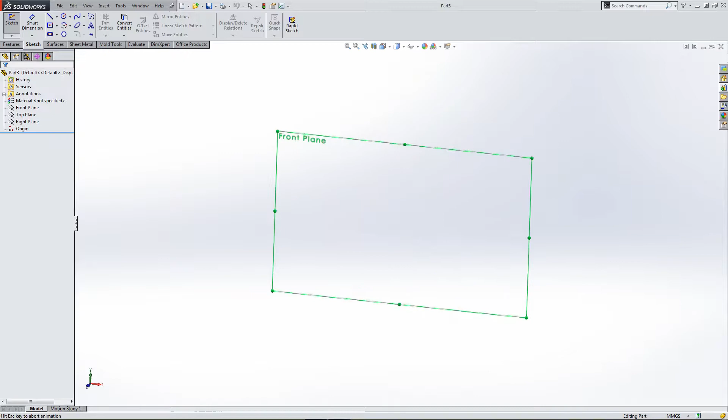Sketch a box, match up to the origin point. Then let's add some dimensions.

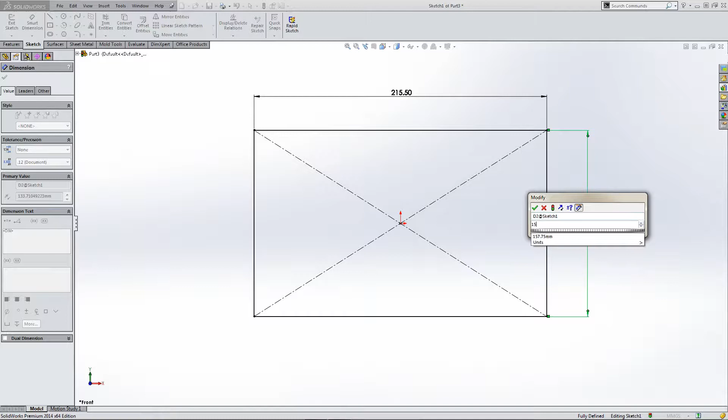215.5. Then let's add our second dimension, 157.75. Okay, so now we're ready to extrude.

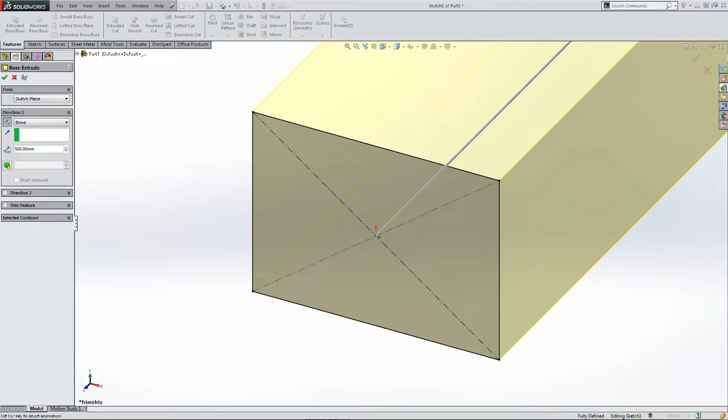Okay, so here's our extrusion option. Let's type in 500 millimeters. Let's go in the other direction. We need to see what's going on here. And extrude. Okay, so here's my box pre-made.

Now we need to add a split line, so let's draw on the top face. Let's put in a line. Okay, we're happy with that.

Okay, so now let's go to the mold tools toolbar, split line, and we've pre-selected the sketch. So now we need to select the face. There's the face.

Happy with this. It was a projection, and here's one face and our other face, both sides of the split line. Right, so now we need to go and convert to sheet metal.

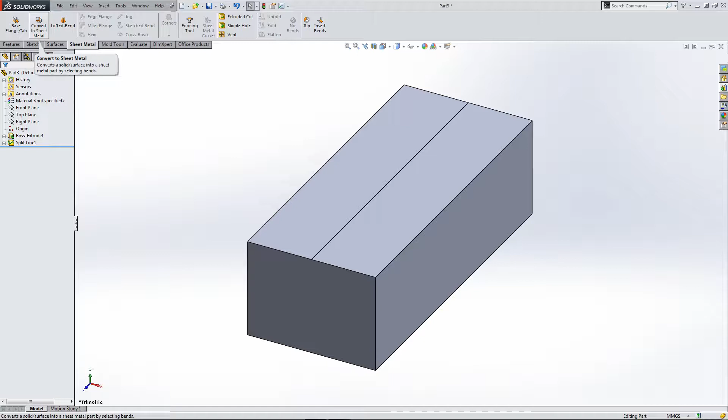So here's the icon in the sheet metal toolbar. The first thing we need to do is to select our unmoving face. And then we need to collect our bends.

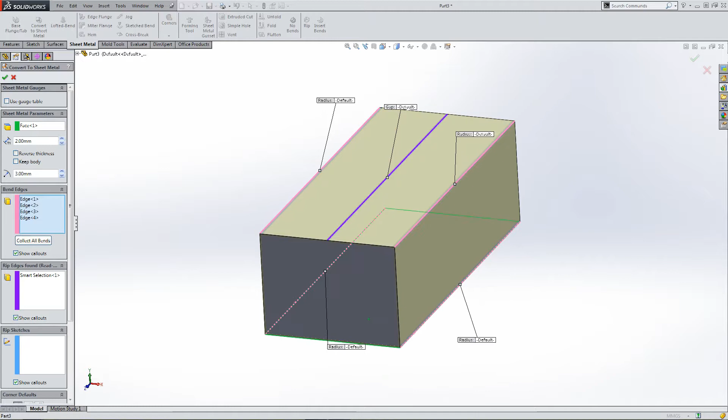So here's the first edge, here's a second edge, and then we've approached the split line, so we need to build our other side. So 1, 2 corners, and let's zoom in.

You can see the corners that we're applying by default. So we can change these, you can see in the corner, and changing to 4 mil. Let's go back to 2, and I can change the thickness. Let's go back.

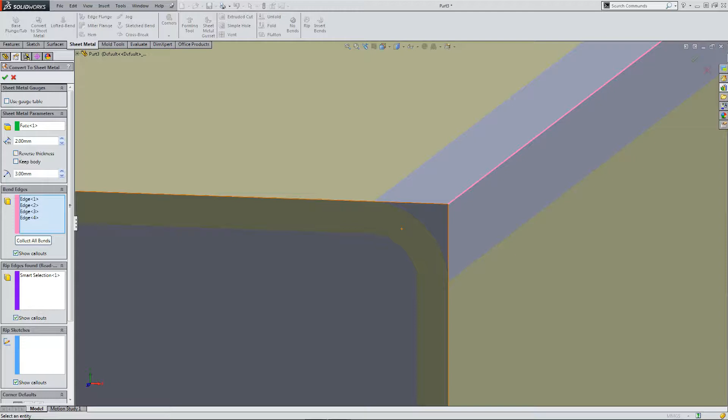We can also reverse, but we're going to build this on the inside because we've got the right dimensions.

Just in case we do want to change the width of this split, we can, if we go down to the corner defaults, you see the gap, we can modify the gap, make it a bit smaller, and we can try different types of corner fit to kind of just manipulate this gap.

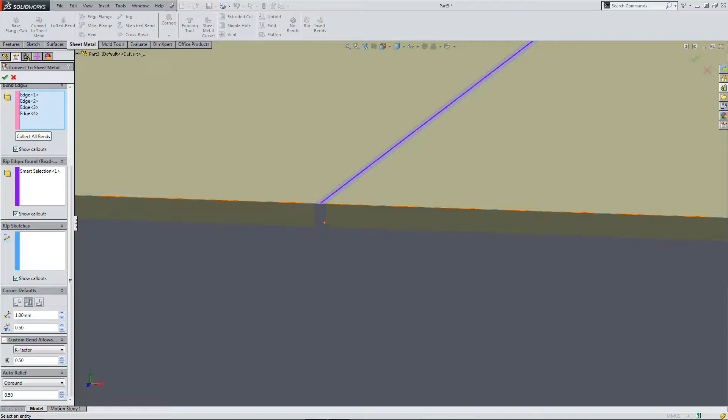Okay, so I'm happy. Let's have another look at our part before we convert to sheet metal. Okay. And that's it. That's our sheet metal part.

Okay, so here's the flat view, just to show it unraveled. So we've selected the flatten option. Now let's unflatten again. So we've got our box.

Okay, so we need some connection points for our trunking section. So right, I've just selected a simple hole. Let's map it onto this side face.

So it's going to be 6 mil in diameter. Through all, because we want a couple of holes, one on each side of this face.

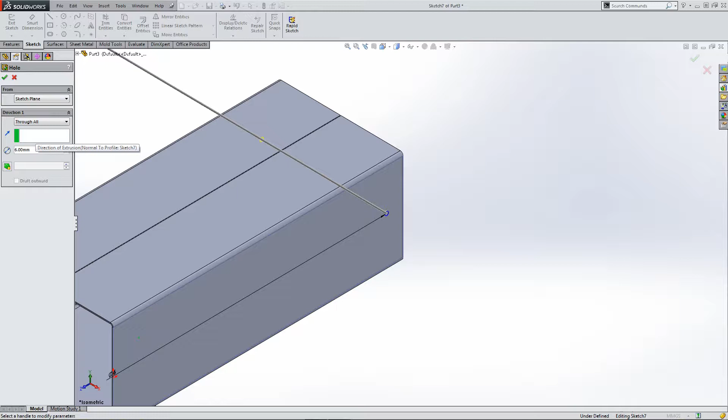Okay, so well, but we haven't positioned it so far, so we've just drawn the hole. But we can go back and we can position it.

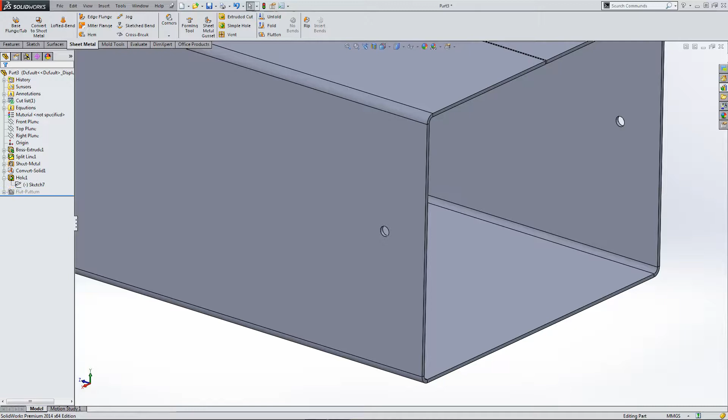So if we, let's just tidy this up. Let's go onto the side panel, select the sketch. Okay, so it's unconstrained, it's blue, so let's constrain it.

So let's put in a little mounting line, let's straighten it up, and then we need to kind of bring it a set distance away from the edge. So let's make this, let's say 10 mil.

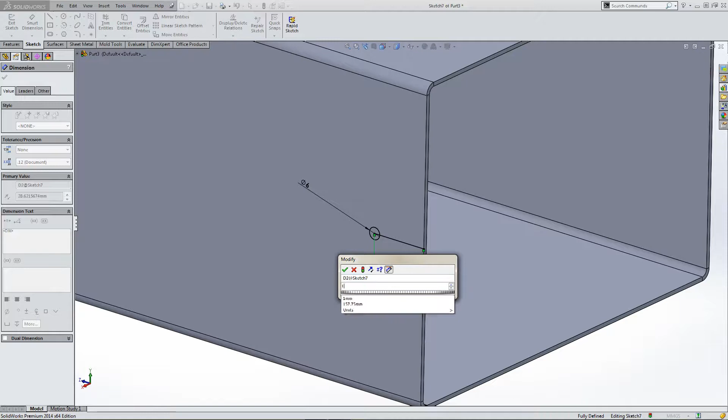Okay, and this is no good at the moment, so we need to turn it into a construction line. So I've ticked the box for construction. Okay, so now we're fully constrained, everything's black. We're happy with this.

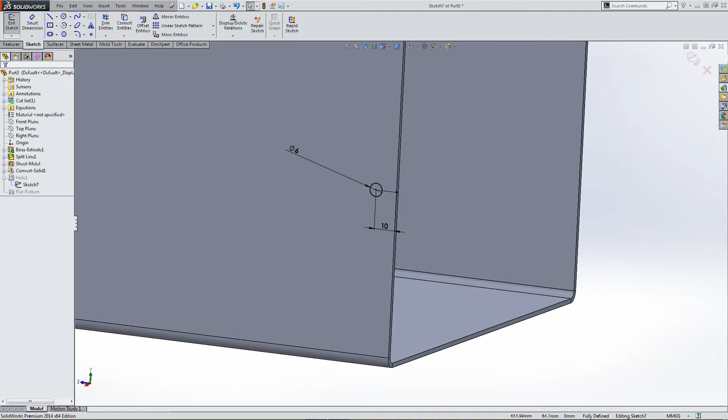Exit the sketch, and we've got 2 fully constrained holes. And that's it. That's our box section part.

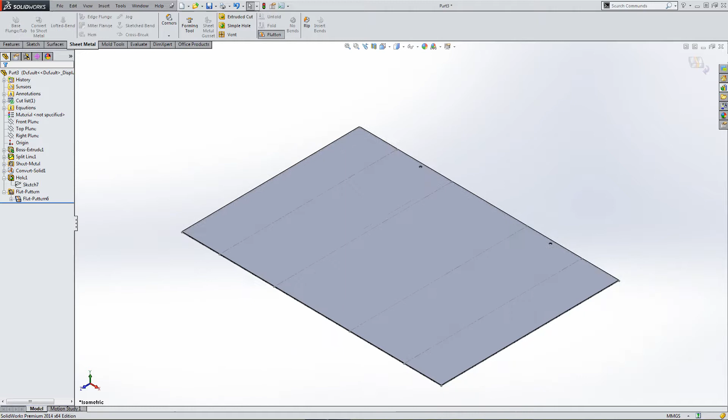We're ready to assemble with our main trunking section. And just to show you the flat view, the hole's still there. And there it is.

Okay, so in the previous section of this video, I showed you the forming tool section going onto the main part. But now let's actually show you how that's actually built.

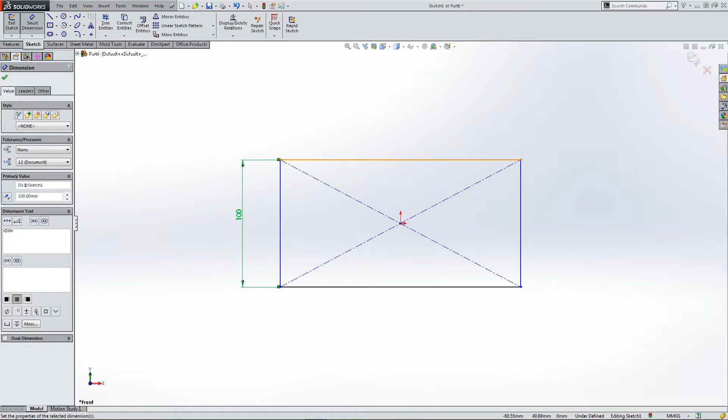So I'm drawing a square on a plane, and this is going to form the base of the forming tool. So 100 by 100 square, extrude, boss extrude, 5mm, doesn't have to be thick.

Okay, and this is our plate. So now we're drawing on this plane, and let's extrude another box.

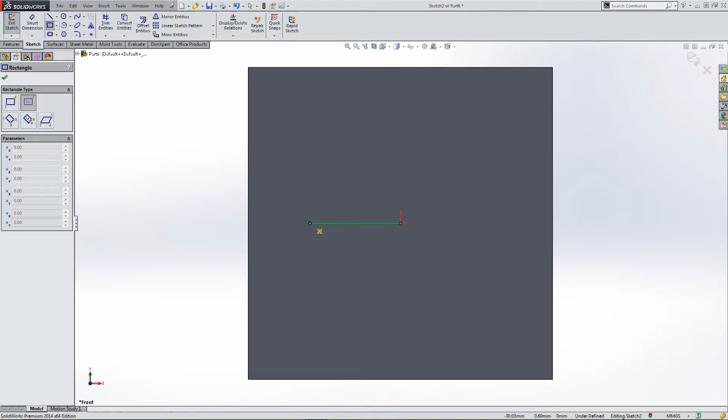Start off with our construction geometry. Here's our box, and this is going to be one of the thin sections of the vent. So let's position it 35mm back.

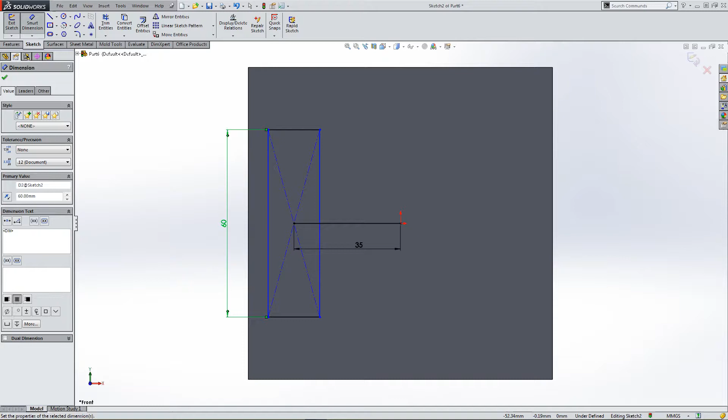Going to dimension my box. So here we go, 60mm. Select the right kind of thickness, 10mm. Okay, I've already worked this out pre-video, so I know this is the right position for my vent section.

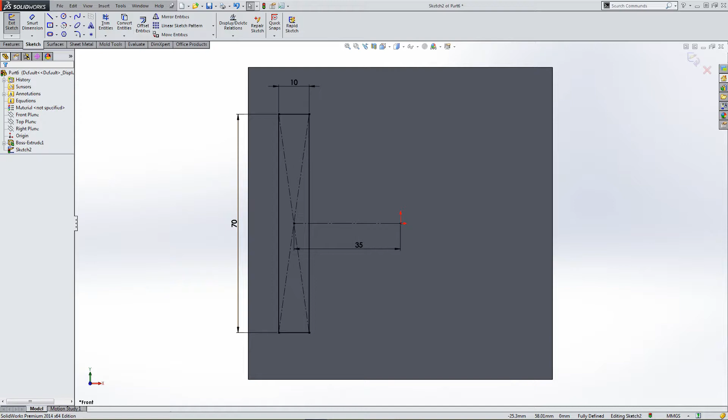70mm. Let's change it, it's a bit longer. We're happier with that, notice everything is fully constrained. So now let's extrude, boss extrude, and let's come out 5mm. Yep, I'm happy with that.

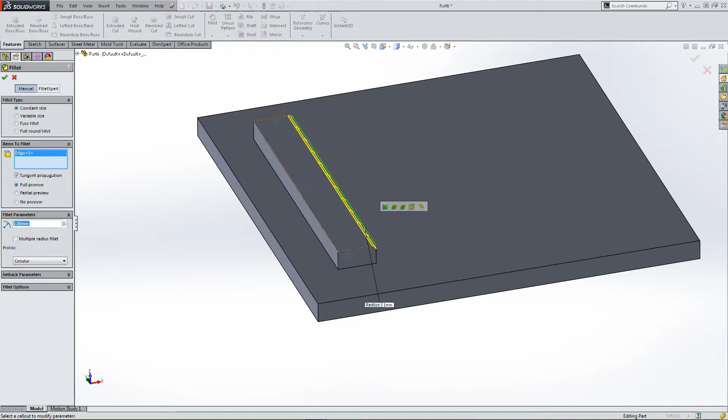Okay, so this is the beginning of our forming tool. So here's one of our vent sections. We're going to fillet an edge. No, let's chamfer that edge instead. Put a generous chamfer in, 5mm, 45 degrees. Okay, yeah, I'm happy with that.

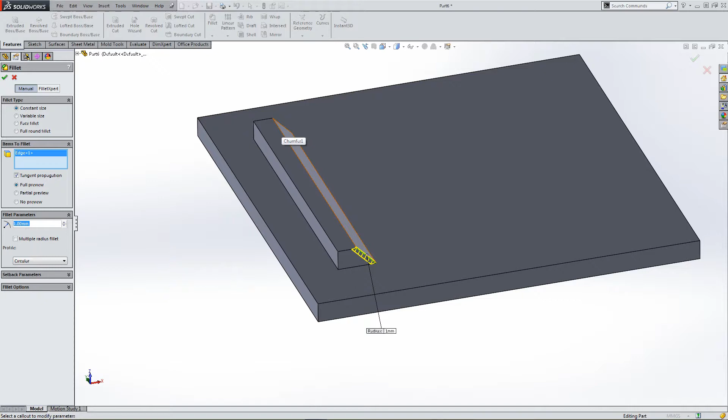Now I need to think, because this is a stamping tool basically, I need to round the edges that I'm looking to keep, because when I stamp I don't want to make sharp corners. So using my fillet tool to select all the edges that I want to keep and kind of just press into my metal part.

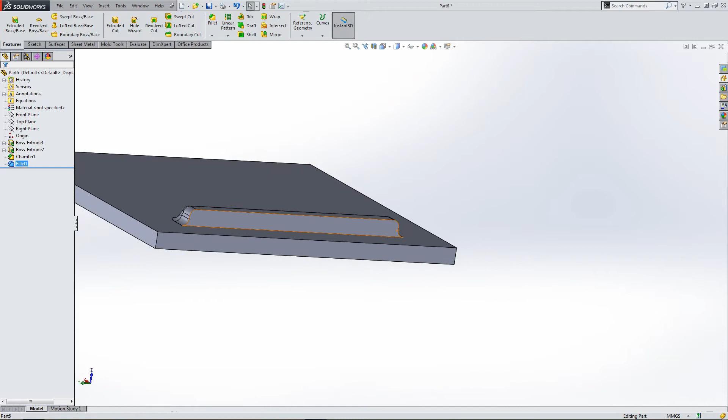So, 2mm, I think 2mm I get away with. 3mm might be better depending on the thickness of the metal part that you're stamping into, you need to consider the impression that you're going to make. So for a 2mm part, you might decide to make your rads 3mm so that you get an impression of a rad on both sides of the metal stamping.

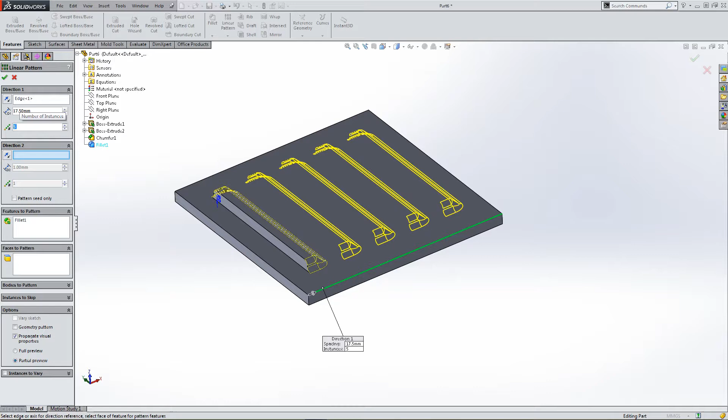So okay, here I'm doing a linear pattern. 17.5mm across, 5 versions. Select all the features that I'm going to form in this linear pattern, so my boss extrude, my chamfer, my fillet, and yeah, so I've got the beginnings of my grill, my vent stamp.

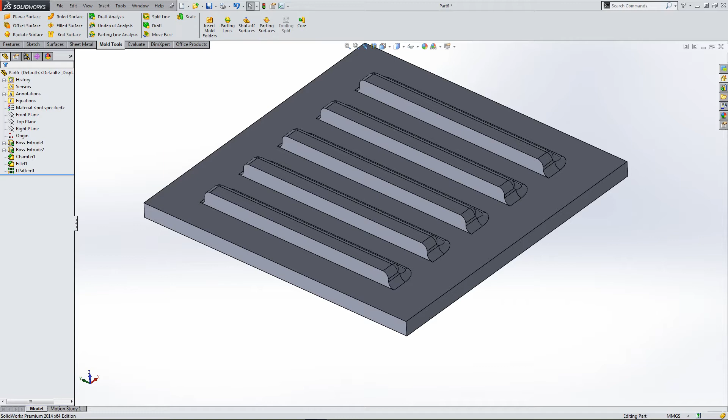Let's go to mold tools. Let's go to sheet metal forming tool. Okay, so stopping face, and that's going to be basically the face of the tool. And faces to remove, so it's a vent, so I need to cut some parts out.

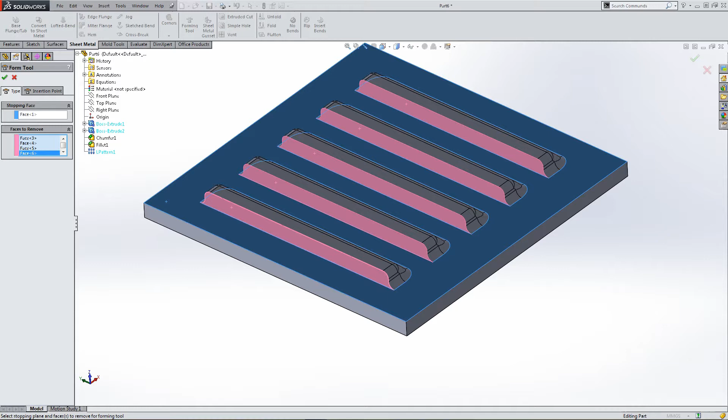So these faces I've built up, they're going to shear off as far as my forming tool is concerned. So I'm going to impress the yellow sections and cut the red sections. So that's the crux of the forming tool.

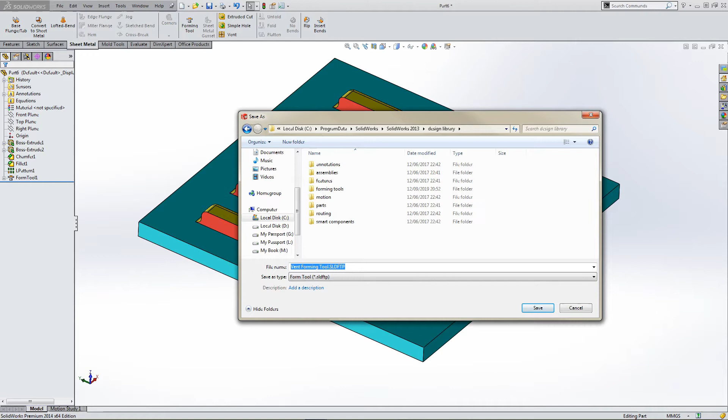So save as. No, let's give it a new name. So it's vent. Got to think about where I'm going to put it as well. Yep, so vent forming tool, and I need to find the forming tool file part name, which is somewhere near the top. There you go, form tool, and it's automatically defaulted to the design library, and I'm just going to save it there. So if I move over to the side, design library, click design library, and my forming tool is there, right there. And that's it. My forming tool is complete.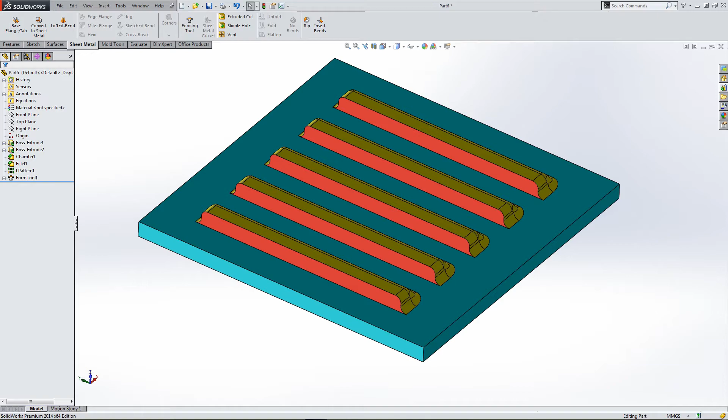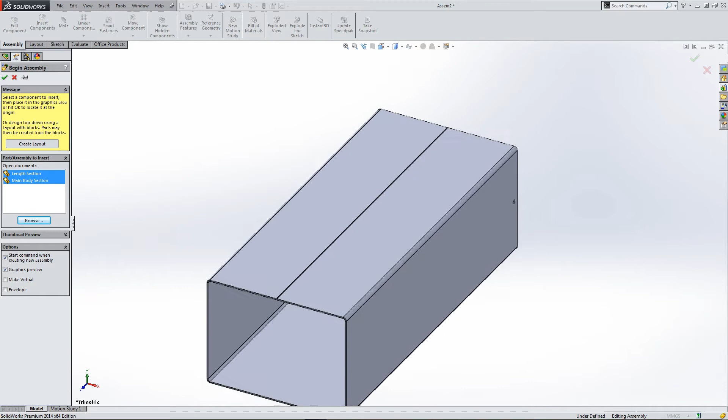Let's begin the assembly section of our video. So let's create an assembly file. Let's search our two part files, length section and main body. Place the length section, then the main body.

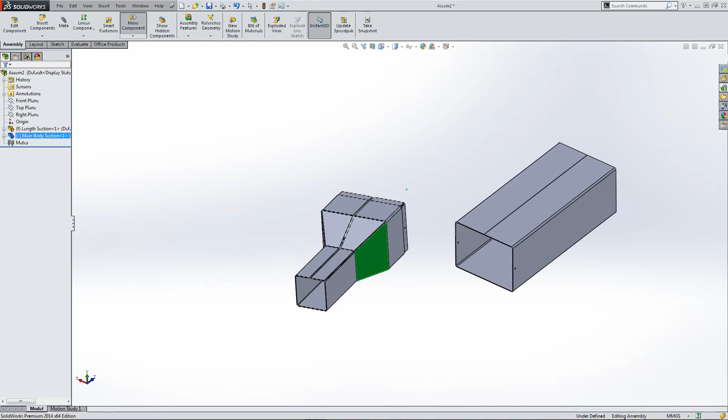Okay, spin them round. You can see one's going to fit into the other. So let's get the orientation right, because we want the bolt holes to line up. So we know they're generally in the right position. The length section is actually constrained at the moment, whereas the main body is free to move around.

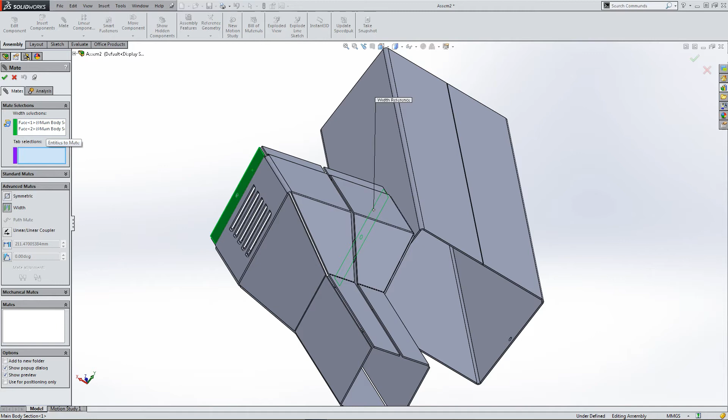So let's try width mate. Select two faces that we want to form the width mate from the main body, and then the purple bar. Select two corresponding faces, and basically this is going to line up the part between the four faces we've selected. We can do this again, mate one more time.

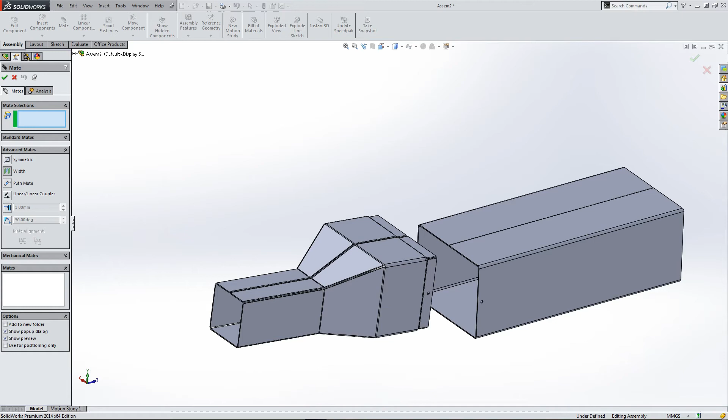Go back to the width mate. Select two faces from the main body, and then two corresponding faces from the length section, and it lines everything up. Basically everything's central between the four face references.

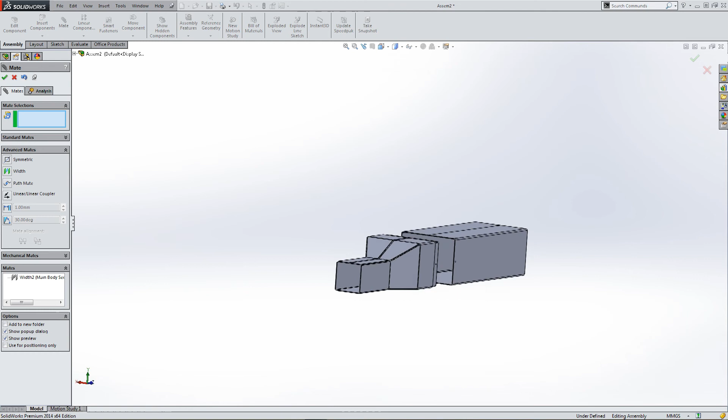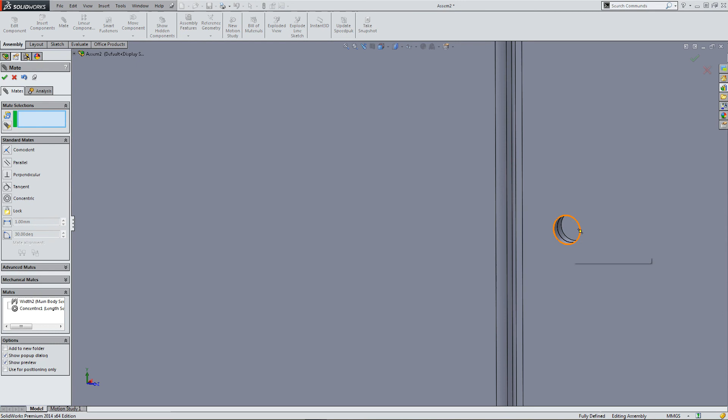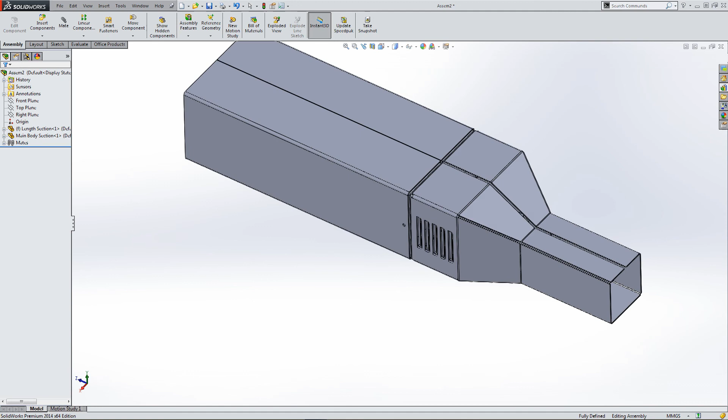Okay, so these two parts should now just slot together. So if we select our bolt holes, if I've modelled this properly, it all goes together without any alerts. So all that hard work putting those jog features together. Now we've got two parts that are fully mated. And there you have it, our two box sections.